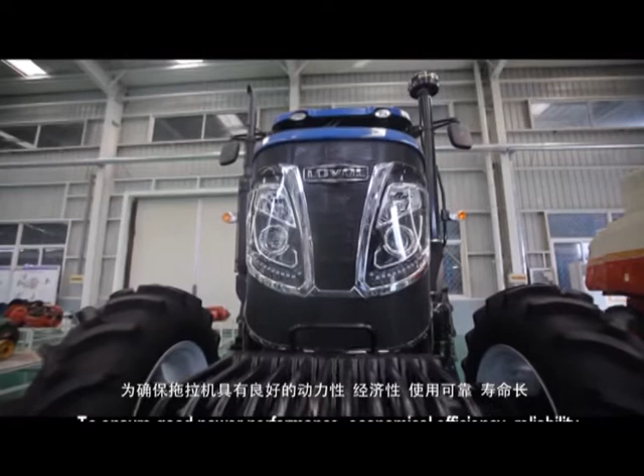Hello dear users. To ensure good power performance, economical efficiency, reliability and long service life of the tractor, please use the machine with reference to the requirements mentioned in the instructions. Due to constant product updating, technical specifications and structure of our tractor are subject to change and improvement. This may result in the practical product being somewhat different from that in the specification. Please be careful when you use it.

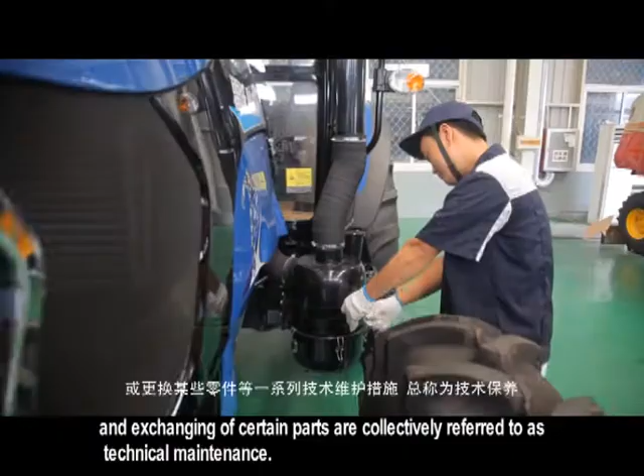Maintenance and service instructions. A series of technical maintenance measures including regular cleaning, checking, lubricating, tightening and adjustments of various parts of the tractor, and exchanging of certain parts are collectively referred to as technical maintenance. Good maintenance can slow the pace of deterioration of technical conditions of various parts, reduce failure, prolong service life, and ensure good working condition of the tractor.

Technical maintenance procedures. Maintenance intervals of Lovol series tractor, according to accumulated work hours, include technical maintenance per shift, every 10 work hours, every 50 hours, every 200 hours, every 400 hours, every 800 hours, every 1600 hours, and special winter maintenance and service, and technical maintenance for long-time storage.

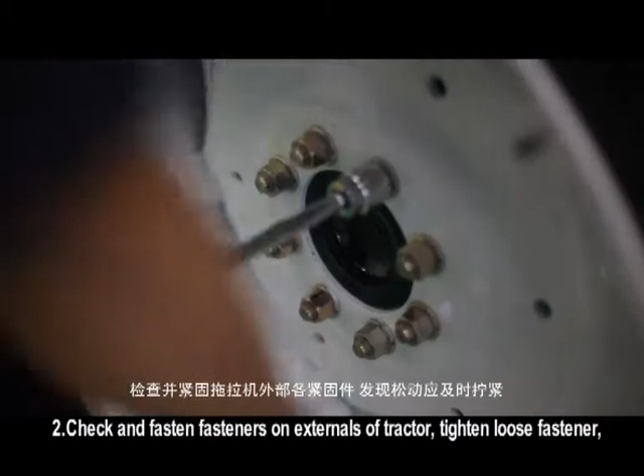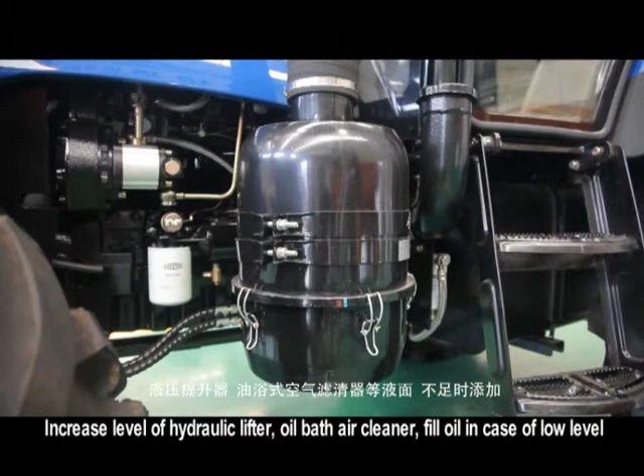Technical maintenance per shift. Clean dust and oil dirt on the tractor. Check and fasten fasteners on externals of the tractor, tighten loose fasteners, especially the nut on the front wheel. Check engine oil pan, water tank, fuel tank, hydraulic steering tank, service brake tank, hydraulic lifter, oil bath air cleaner, and fill oil in case of low level. When checking the level of the oil pan, the tractor must be parked on level ground. Check it 15 minutes after the engine stops.

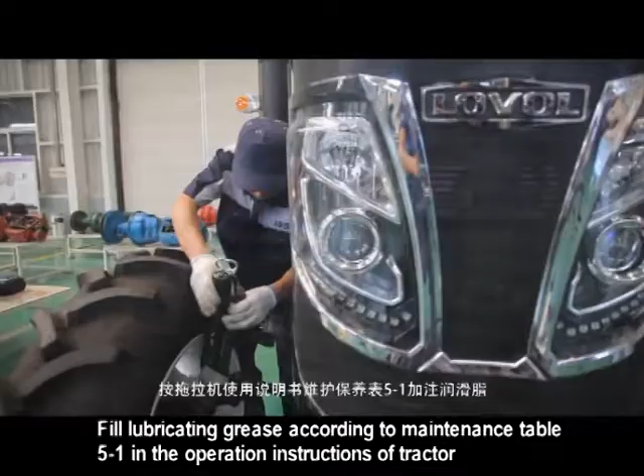Attention! If water temperature is too high, stop the engine to cool the water to below 40 degrees Celsius, then open the filler cap to refill coolant, wearing gloves or using cotton cloth. Fill lubricating grease according to Maintenance Table 5-1 in the operation instructions of the tractor.

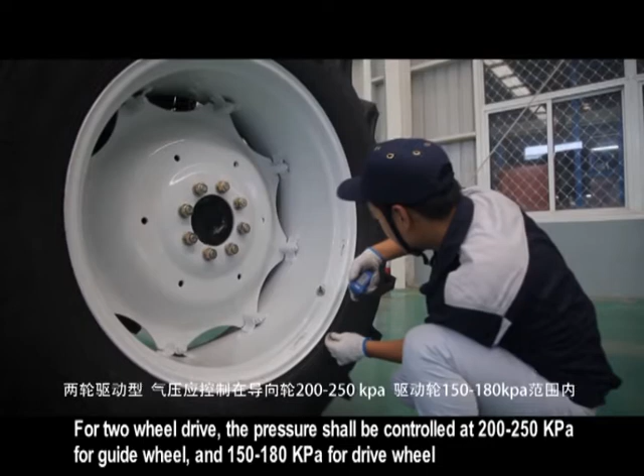Check air pressure of front and rear tires, inflate in case of insufficient pressure. For two-wheel drive, the pressure shall be controlled at 200 to 250 kPa for guide wheel, and 150 to 180 kPa for drive wheel. For four-wheel drive, the pressure shall be controlled at 120 to 150 kPa for guide wheel, and 150 to 180 kPa for drive wheel.

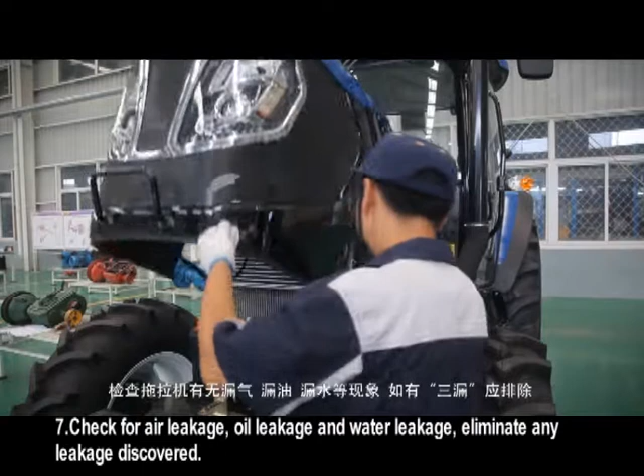Check and adjust the free stroke of main and auxiliary clutch and brake pedal, which shall be 28 to 40 mm for main clutch pedal, 45 to 55 mm for assistant clutch, 12 to 16 mm for brake pedal. Check for air leakage, oil leakage and water leakage. Eliminate any leakage discovered. According to requirements in the operating and maintenance instructions for the diesel engine, maintain the diesel engine according to requirements for technical maintenance for routine shift.

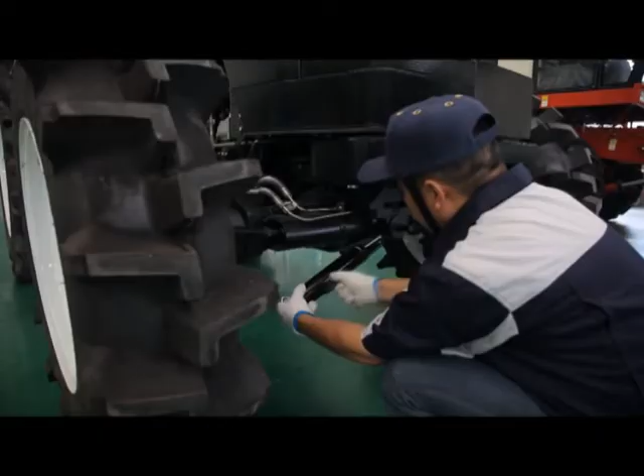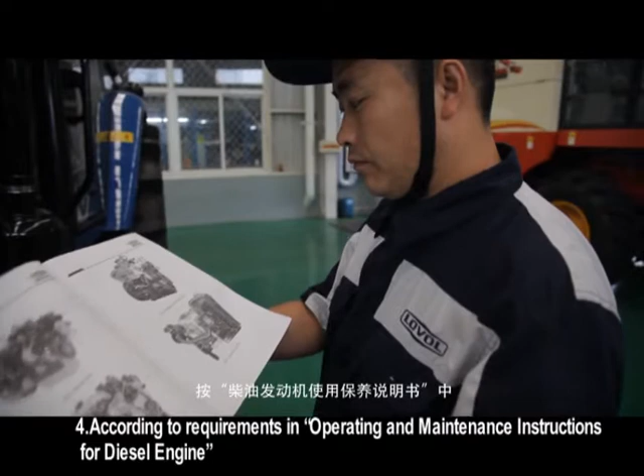Technical maintenance every 50 hours. Complete all works of technical maintenance per shift. Fill lubricating grease according to Maintenance Table 5-1 in the operation instructions of the tractor: front-axle pendulum of four-wheel drive, axle bed of front drive shaft, rock shaft of main and auxiliary clutch. Check the oil level in oil bath air filter and remove dust. According to requirements in the operating and maintenance instructions for the diesel engine, maintain the diesel engine according to requirements for Class I technical maintenance.

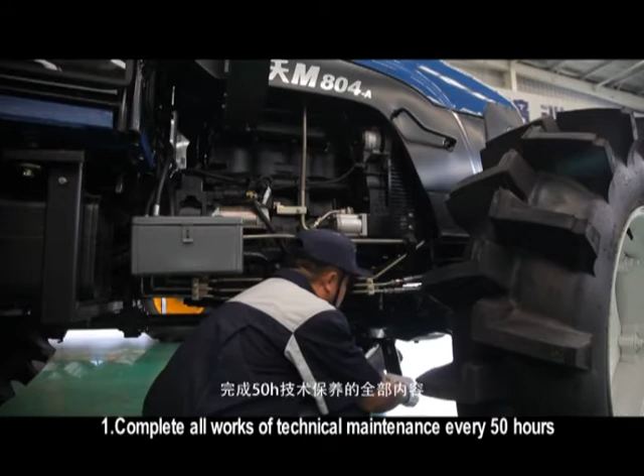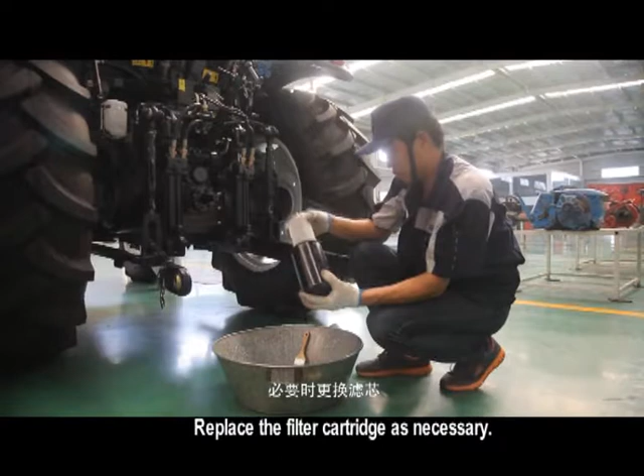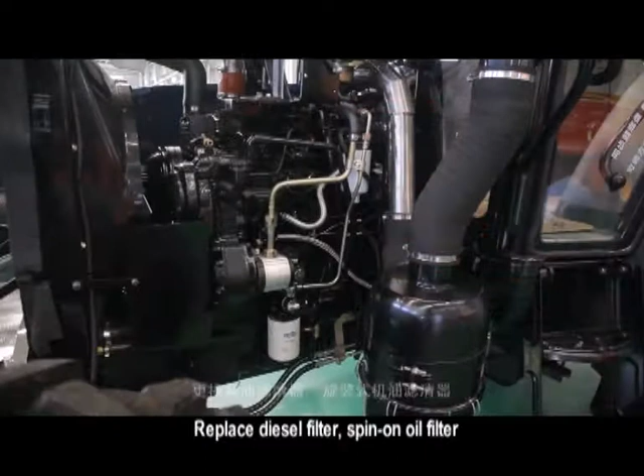3. Technical maintenance every 200 hours. Complete all works of technical maintenance every 50 hours. Change oil pan grease of diesel engine. Clean and maintain oil basin of oil bath air filter. Clean hydraulic oil filter of lifter. Replace the filter cartridge as necessary, according to requirements for Class II technical maintenance and the specification for operation and maintenance of the diesel engine. Conduct maintenance for diesel engine. Replace diesel filter and spin-on oil filter.

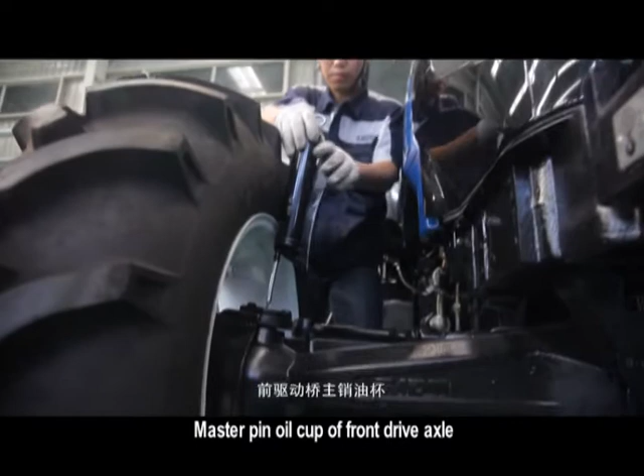4. Technical maintenance every 400 hours. Complete all works of technical maintenance every 200 hours. Fill lubricating grease according to Maintenance Table 5-1 in the operation instructions of the tractor: master pin oil cup of front drive axle. Check central drive of front drive and oil level of end drive.

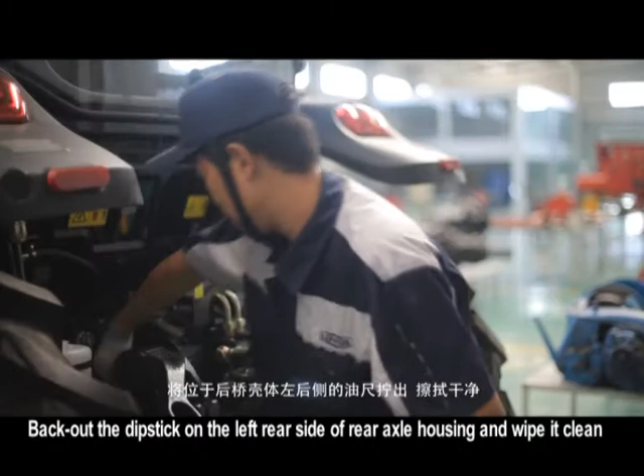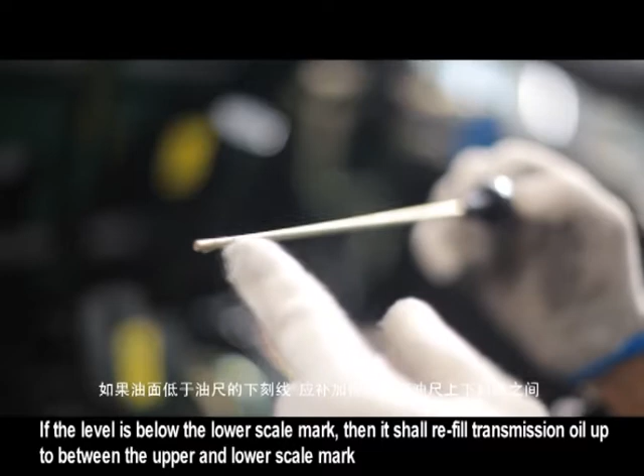Add oil as necessary. Check oil level of transmission system. Add oil as necessary. When checking the oil level, the tractor must be parked on level ground and flamed out. Back out the dipstick on the left rear side of rear axle housing and wipe it clean. Then place dipstick in. If the level is below the lower scale mark, then refill transmission oil up to between the upper and lower scale mark.

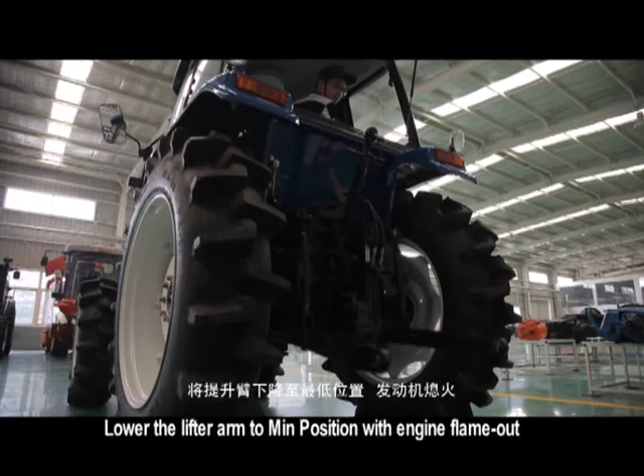Measure oil level 5 minutes after oil refilling. Park the tractor on level ground and check the oil level. Lower the lifter arm to min position with engine flamed out. Back out the upper cover of dipstick, check oil level. If the level is below the lower scale mark, then refill transmission oil up to between the upper and lower scale mark. Check the free stroke of parking brake handle and make adjustment as necessary.

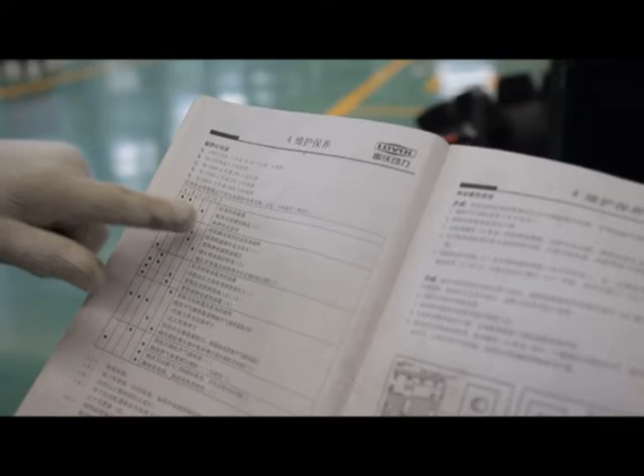Clean and maintain hydraulic steering tank filter. According to requirements in the operating and maintenance instructions for the diesel engine, maintain the diesel engine as per requirements for Class II technical maintenance.

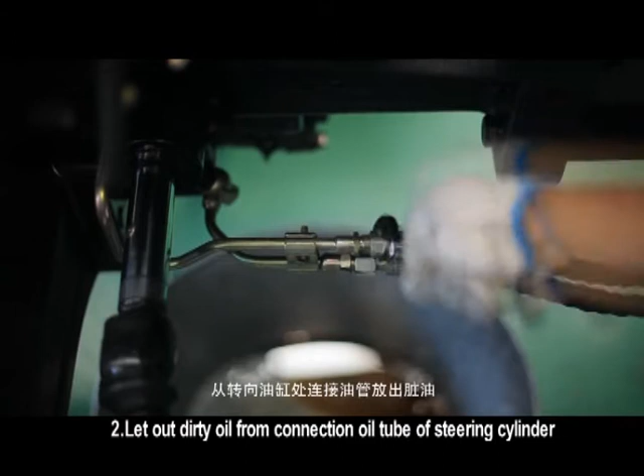Technical maintenance every 800 hours. Complete all works of technical maintenance every 400 hours. Let out dirty oil from connection oil tube of steering cylinder. Replace transmission hydraulic oil of hydraulic steering system. Use Lovol special oil when replacing transmission system lubricating oil.

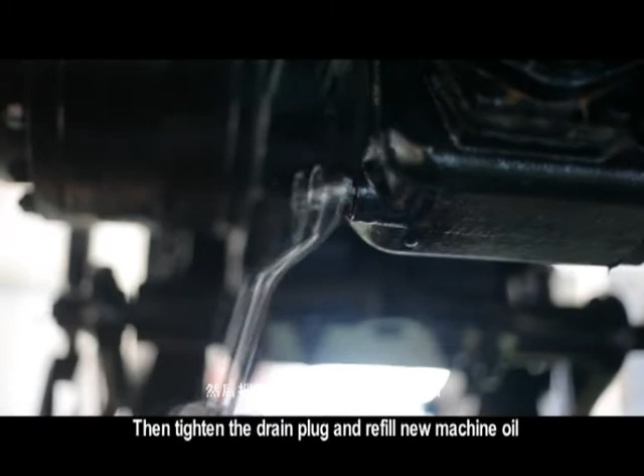Remove the drain plug at the bottom of transmission case. Let out dirty oil and clean with diesel oil. Then tighten the drain plug and refill new machine oil. Use Lovol special oil when replacing lifter hydraulic oil. Remove the drain plug, empty dirty oil and clean the transmission case. Refill new oil as required.

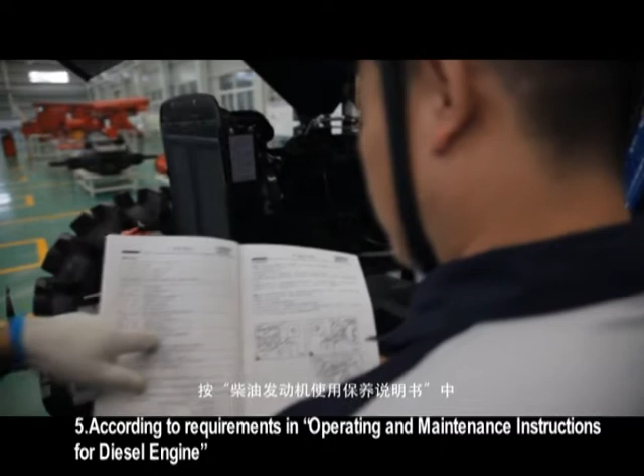Clean and maintain fuel tank. According to requirements in the operating and maintenance instructions for the diesel engine, maintain the diesel engine as per requirements for Class III technical maintenance.

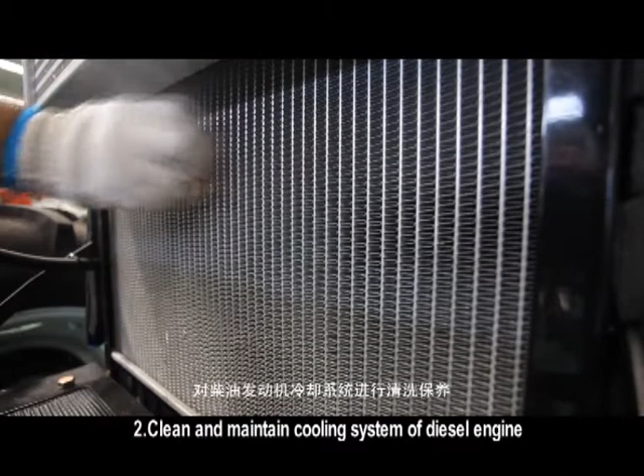6. Technical maintenance every 1600 hours. Complete all works of technical maintenance every 800 hours. Clean and maintain cooling system of diesel engine. Replace lubricating oil for main drive of front drive axle and final drive. Check, adjust and maintain the starting motor.

According to requirements in the operating and maintenance instructions for the diesel engine, maintain the diesel engine as per requirements for Class 3 technical maintenance. Maintain and service parts of Lovol TD series tractor. For operation contents, please refer to the operation instruction of each series products.

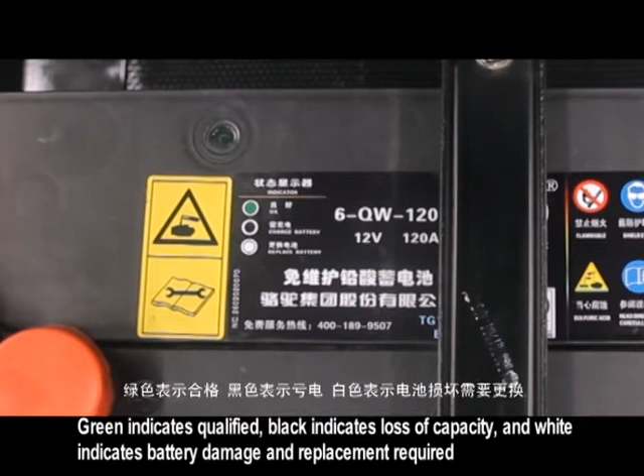Maintenance and service of the maintenance-free battery. Maintenance requirements of maintenance-free battery. Check if the battery is firmly fixed on the tractor. Check the battery surface for gouges and bruises. Check if the battery cable is firmly connected. Check charging condition and quality status of battery via the electric eye. Green indicates qualified. Black indicates loss of capacity, and white indicates battery damage and replacement required.

Precautions: battery shall be stored after full charge, loss of capacity storage is prohibited. Battery shall be checked every 3 months, replenishing charging shall be conducted in case the voltage drops below 12.5 V, in order to prevent charging difficulty after long time storage and compromising battery service life.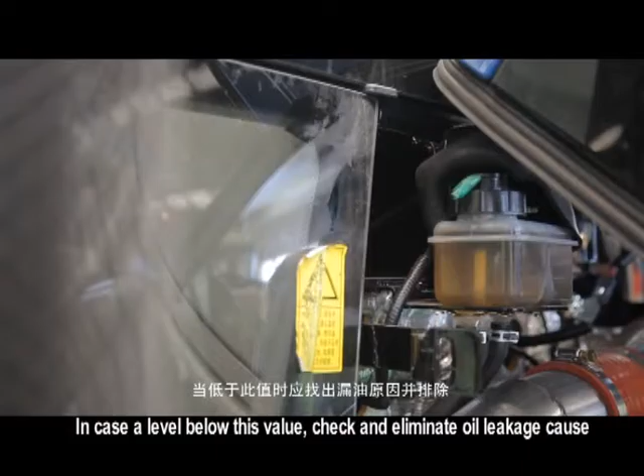2. Maintenance and service of drive brake tank. Brake liquid level shall be 10 to 15 mm higher than the middle convex platform. In case the level is below this value, check and eliminate oil leakage cause. Then refill oil. Attentions: 1. Too little brake fluid will cause brake failure and result in major safety accident. 2. Hydraulic braking oil must be synthetic oil. Braking oil containing alcohol or other machine oil cannot be used, in case of brake failure and major safety accident.

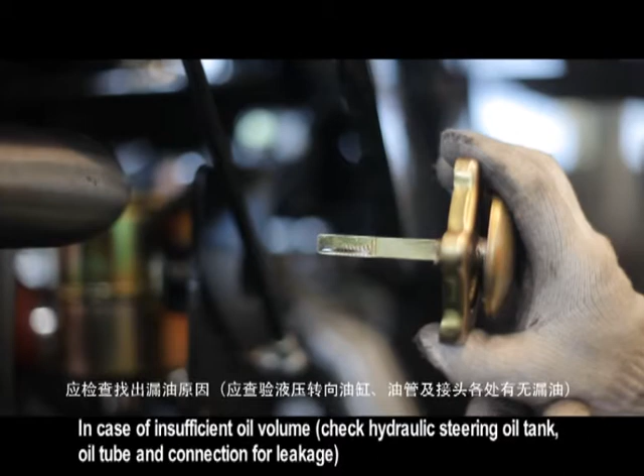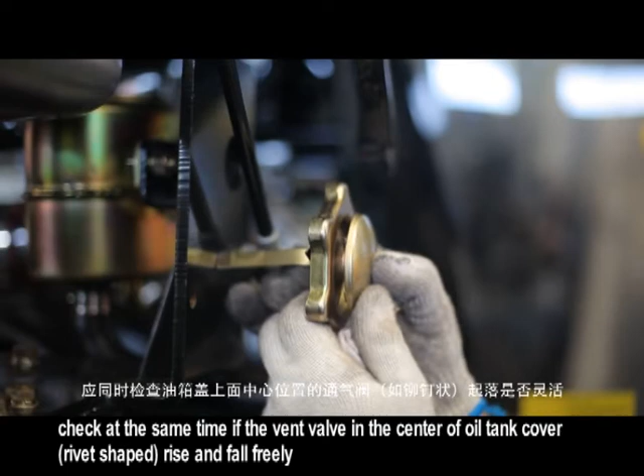3. Inspection and maintenance of hydraulic steering oil tank. Open the oil tank cover and check the oil trace position. In case of insufficient oil volume, check hydraulic steering oil tank, oil tube and connection for leakage. Then refill oil up to the middle scale mark of dipstick. Check at the same time if the rivet-shaped vent valve in the center of oil tank cover rises and falls freely. In case oil stain hampers free movement of vent valve, clean the oil stain.

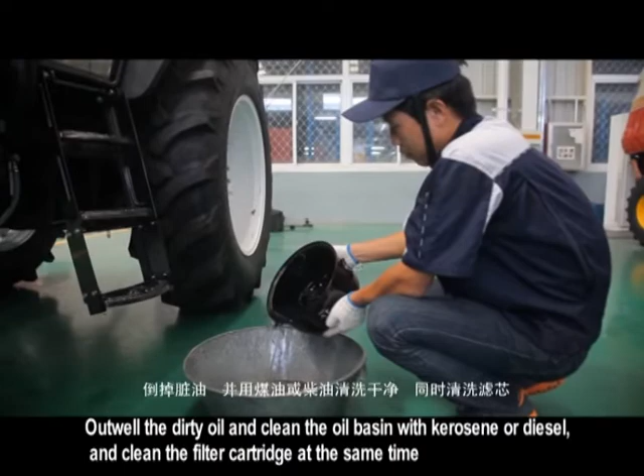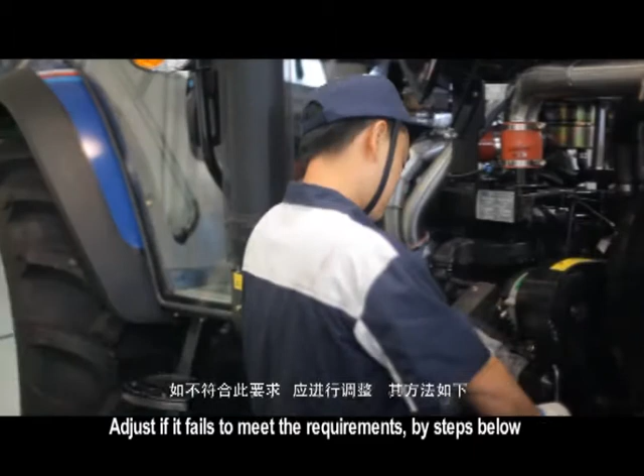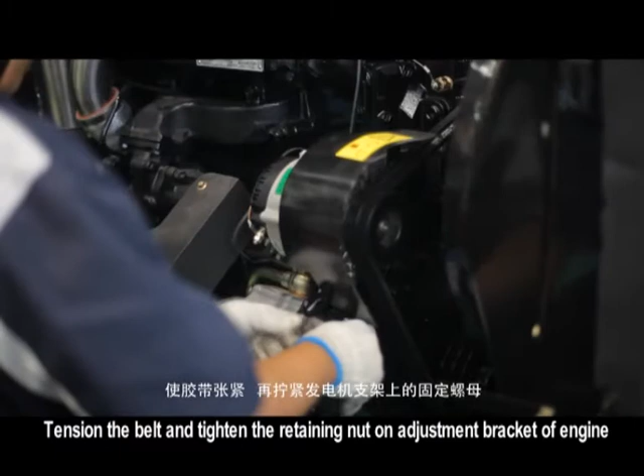5. The adjustment of belt tension. Press down with thumb the middle part of the fan belt. The force applied shall be 29.4-49.0 N. The sagging distance is 15 plus or minus 3. Adjust if it fails to meet the requirements, by steps below. Loosen the retaining nut on adjustment bracket of engine, turn the generator outward. Tension the belt and tighten the retaining nut on adjustment bracket of engine.

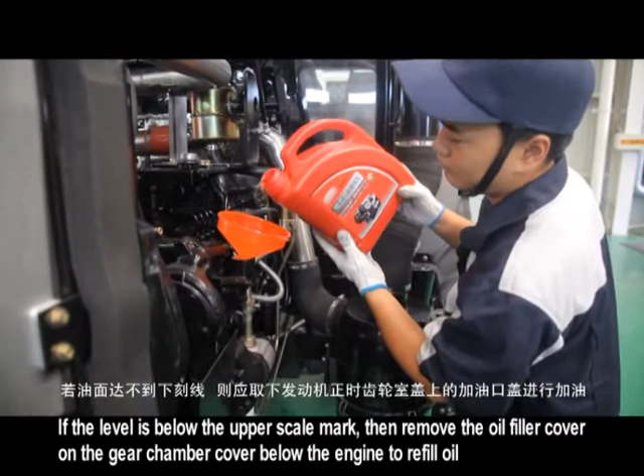6. Check oil volume in engine oil pan and replace oil. Pull out the dipstick on the left front side of the engine oil pan and check whether the oil level falls between the upper and lower scale marks. If the level is below the upper scale mark, then remove the oil filler cover on the gear chamber cover below the engine to refill oil.

Screw out the drain plug below the oil pan during maintenance and oil replacement. Empty dirty oil and clean the oil pan, then refill new oil. 7. Maintenance of front axle. Fill grease to master pin sleeve, central master pin sleeve of front axle. Check the tie rod ball pin nut and the pin nut on both ends of cylinder for looseness.

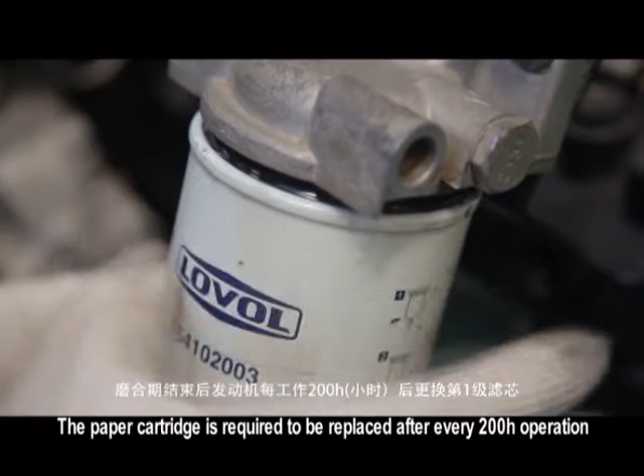8. Maintenance of fuel filter. Engine employs two filters arranged in series. The first filter is near the fuel tank, and the second filter is at the fuel inlet of engine. It is not allowed to clean the paper cartridge of the filter. The paper cartridge is required to be replaced after every 200H operation. Check the filter inside for water.

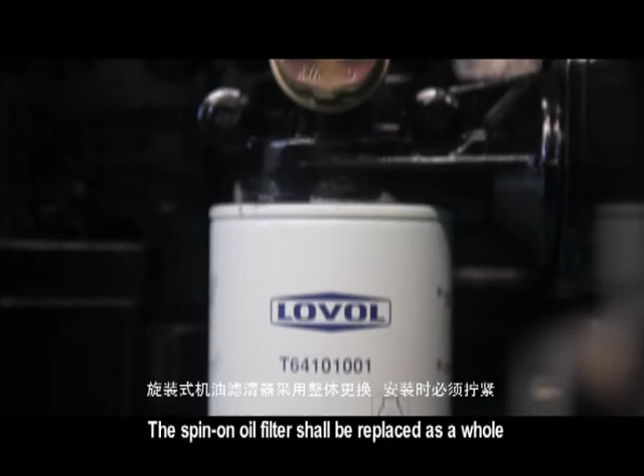9. Maintenance of spin-on oil filter. Oil filter is located on the left lower side of the engine. After the run-in period is finished, the paper cartridge is required to be replaced after every 200H operation. The spin-on oil filter shall be replaced as a whole.

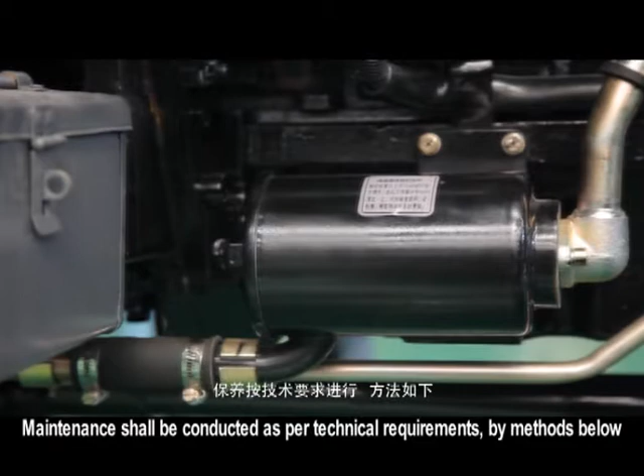10. Maintenance of hydraulic filter. Oil suction filter of lifter is located at the lower right side of the engine. Maintenance shall be conducted as per technical requirements, by methods below. Remove the rear end cover of hydraulic filter to take out the mesh filter cartridge. Clean the filter cartridge with gasoline and blow down with compressed air. If the filter is hard to clean or has been damaged, new filter cartridge shall be replaced.

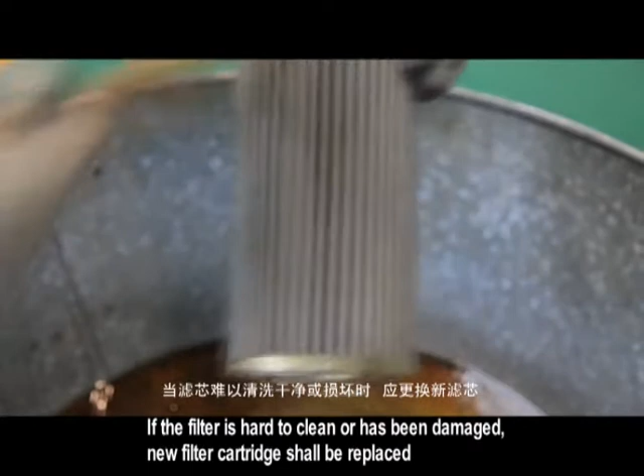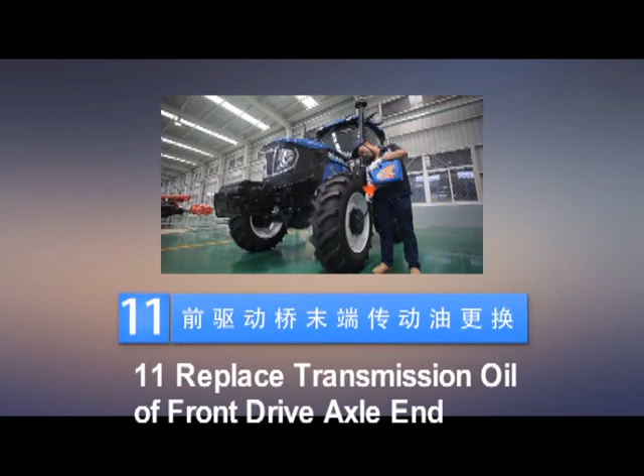Scavenge filter is located on the left side of lifter shell, which shall be cleaned every 200H operation. If the filter is hard to clean or has been damaged, new filter cartridge shall be replaced. 11. Replace transmission oil of front drive axle end. When replacing transmission oil of front drive axle end, the plug mouth shall be at the lowest position to let out dirty oil. Place the plug mouth at horizontal position and add new oil up to plug mouth.

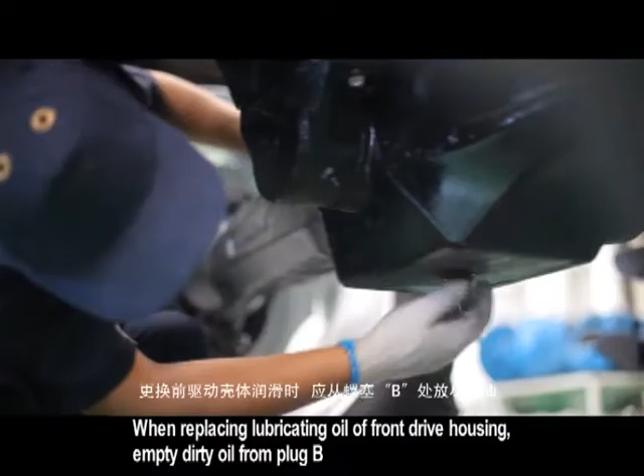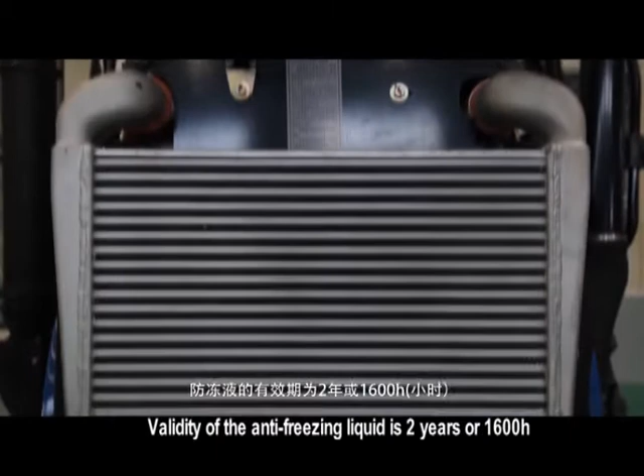12. Replace lubricating oil of front drive housing. When replacing lubricating oil of front drive housing, empty dirty oil from plug B. Retighten plug B, and add new oil from plug A. 13. Maintenance of engine cooling system. Boiled tap water or anti-freezing liquid could be used as engine coolant. Validity of the anti-freezing liquid is 2 years or 1600H. Beyond validity period, anti-freezing liquid shall be replaced and cooling system washed.

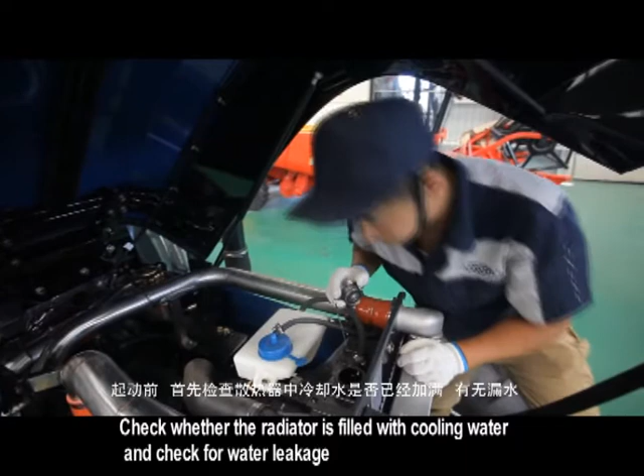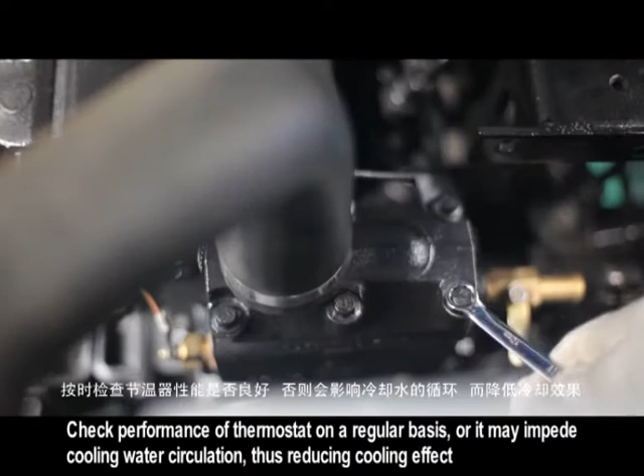Precautions for use of radiator. Check whether the radiator is filled with cooling water and check for water leakage. Check whether the radiator cap is firmly fastened. Check regularly for blockage due to weeds, dust or greasy dirt and clear the blockage if any. Clear regularly incrustation in cooling system to guarantee heat dissipation of heat exchange surface. Check performance of thermostat on a regular basis, or it may impede cooling water circulation, thus reducing cooling effect.

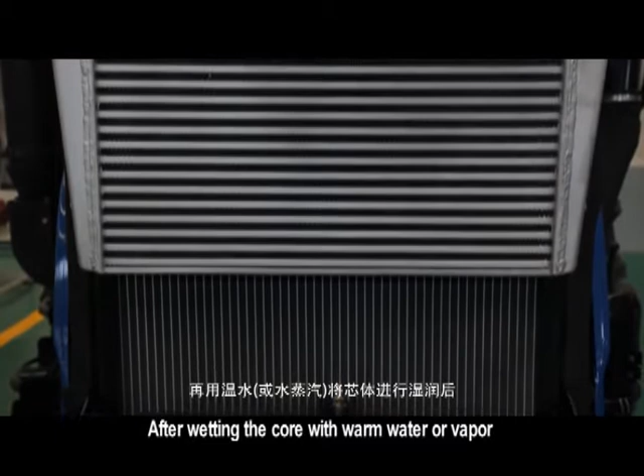Cleaning of the cooling system. Remove weeds and sundries before cleaning. After wetting the core with warm water or vapor, dry the core with compressed air. 14. Maintenance and service of breather. After tractor stops, remove the breather of drive lifter. Replace new breather filter cartridge and install the breather again. Check if the breather is unobstructed.

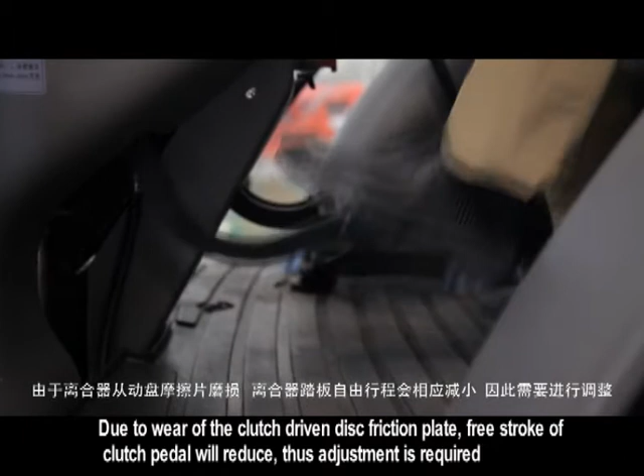Adjustment and maintenance of clutch. Due to wear of the clutch-driven disc friction plate, free stroke of clutch pedal will reduce, thus adjustment is required. 1. Adjustment of clutch and its control mechanism. Adjust the main clutch control mechanism as per steps below.

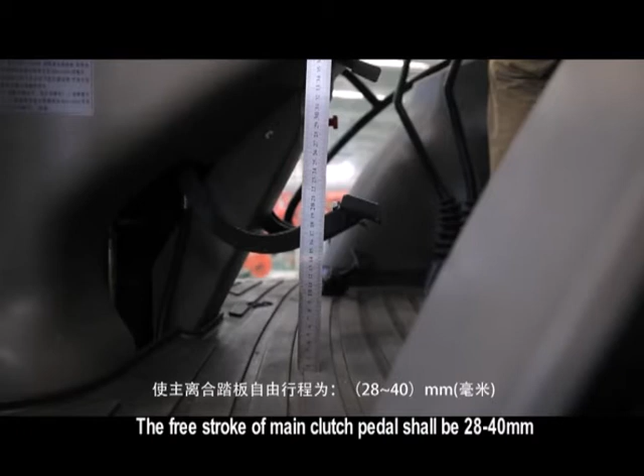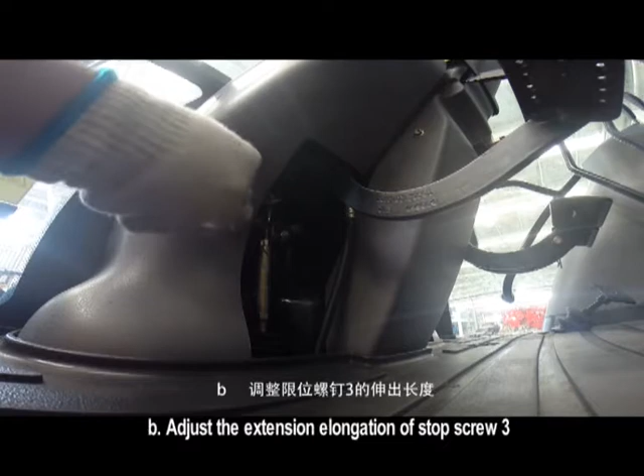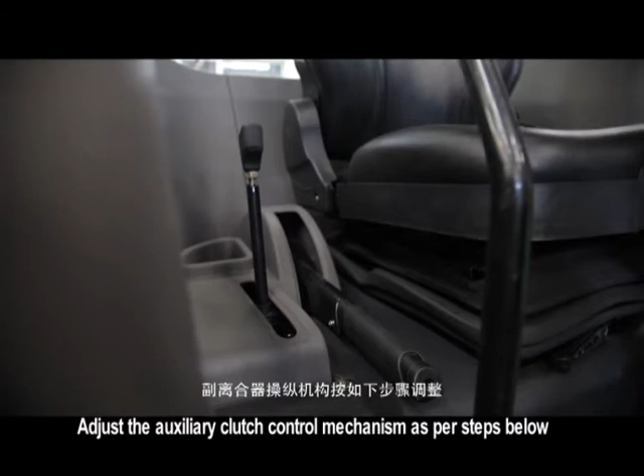Adjust the auxiliary clutch control mechanism as per steps below. A. Adjusting the length of pull rod 13 of auxiliary clutch, the free stroke of handle 1 of auxiliary clutch shall be 45 to 55 mm. Then lock pull rod nut.

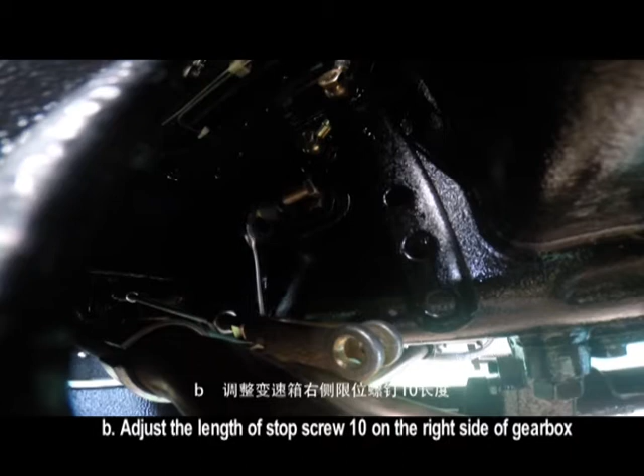B. Adjust the length of stop screw 10 on the right side of gearbox. Full stroke of auxiliary clutch handle 1 shall be limited within 255 to 270 mm. Fully open the auxiliary clutch, make power output to shift gear freely. Lock the stop screw 10 with a nut.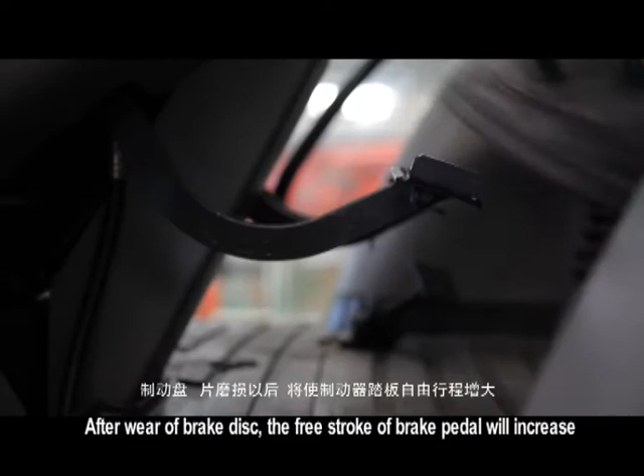2. Brake adjustment. Brake includes travel braking and parking braking. After wear of brake disc, the free stroke of brake pedal will increase, resulting in ineffective braking, or brake failure and consequent serious accident in worst case. By adjusting the stop screw 11, make the pedal center 175 to 185 mm above the floor.

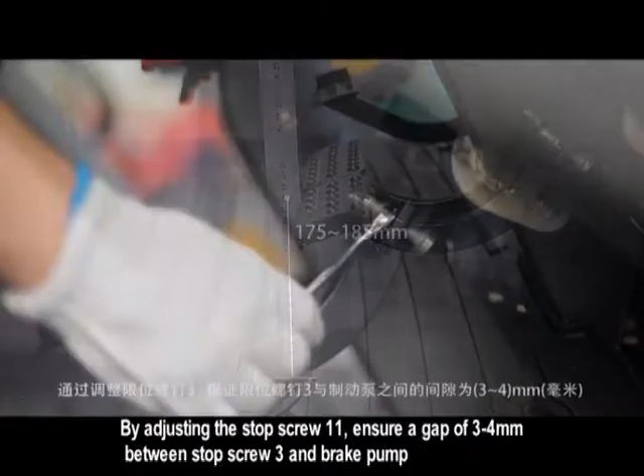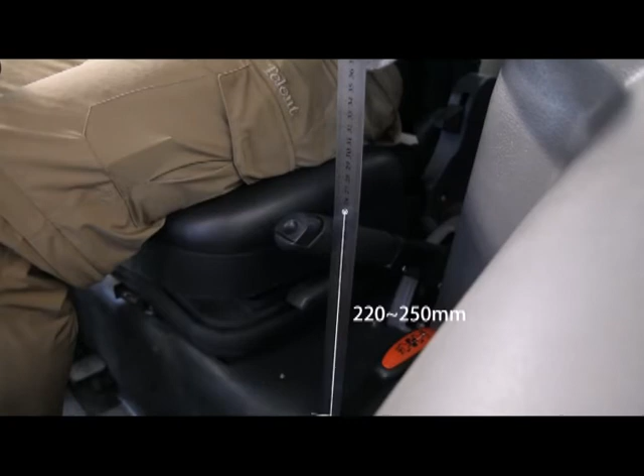By adjusting the stop screw 11, ensure a gap of 3 to 4 mm between stop screw 3 and brake pump. Control the stroke of clutch pedal within 12 to 16 mm. Working stroke of manual brake handle shall be 220 to 250 mm. Adjust the length of manual tie rod to ensure reliable parking brake within specified work stroke.

Specific adjusting method. Put the manual brake handle at the initial position, horizontal position. Loosen nut A, turn adjusting nut B, to adjust the effective length of manual tie rod until the working stroke meets requirement.

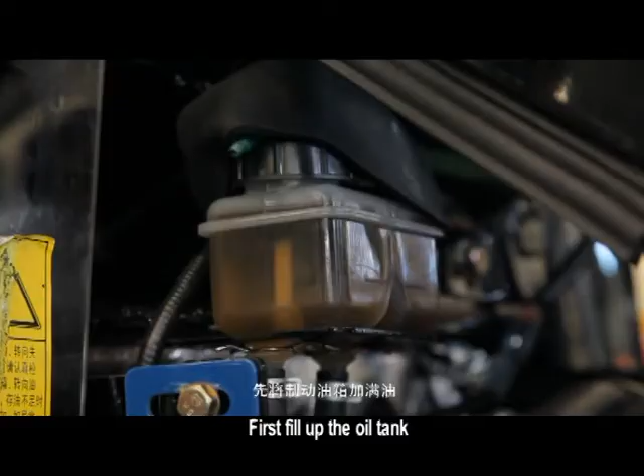Exhaust of brake system. After removal of brake system oil tube, or when conducting brake comfort, synchronism, checking and adjustment, exhaust air from the brake system. Air exhaust must be conducted by well-trained and experienced personnel as per steps below. First fill up the oil tank. Then slowly and fully step down left brake pedal to build brake pressure.

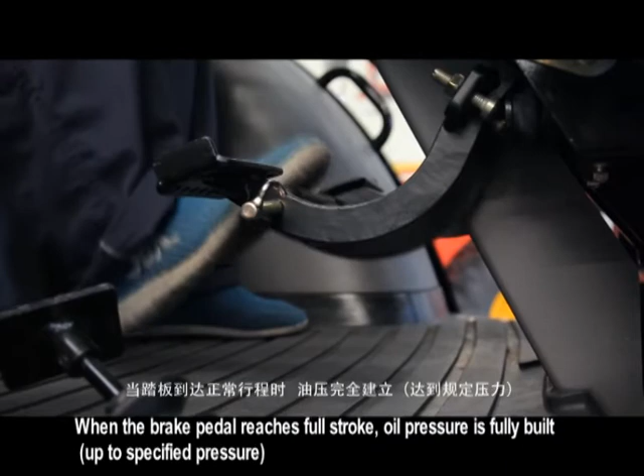Unscrew the bleeder plug A on the top of brake house on one side by half turn to exhaust air. Tighten bleeder plug A, repeat above steps, until the spilled oil is free of bubbles. Then again step down the brake pedal to build oil pressure. When the brake pedal reaches full stroke, oil pressure is fully built, up to specified pressure.

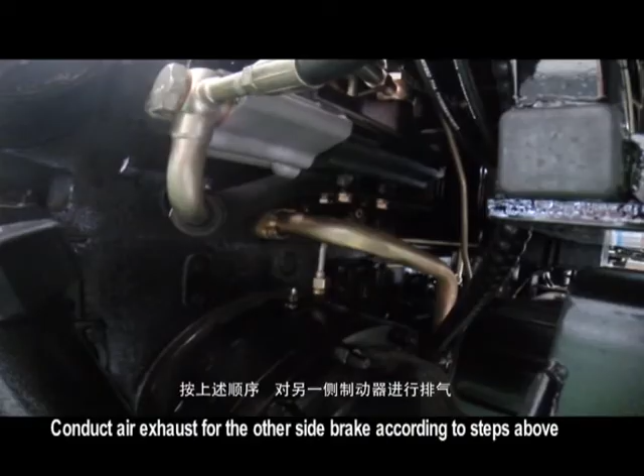Attention: finally wipe clean the oil spilled on the axle shaft house in case paint falls off. Conduct air exhaust for the other side brake according to steps above. Finally fill the brake oil tank to specified level. Warning: brake system may fail if air is not fully exhausted. Attention.

Consistency between free strokes of left and right brake pedals of the tractor must be ensured through adjustment, otherwise accidents may occur due to sharp deflection of tractor to one side.

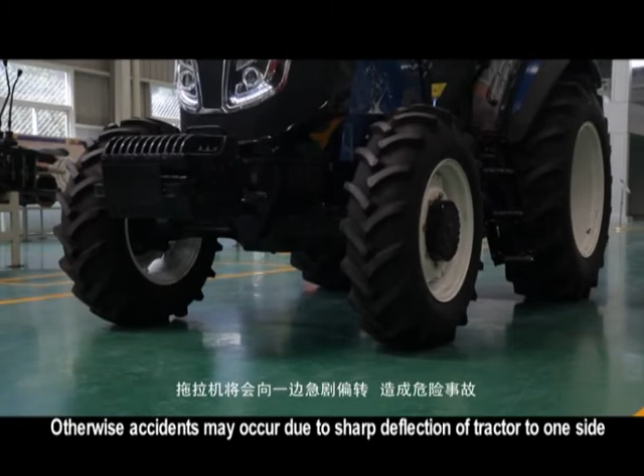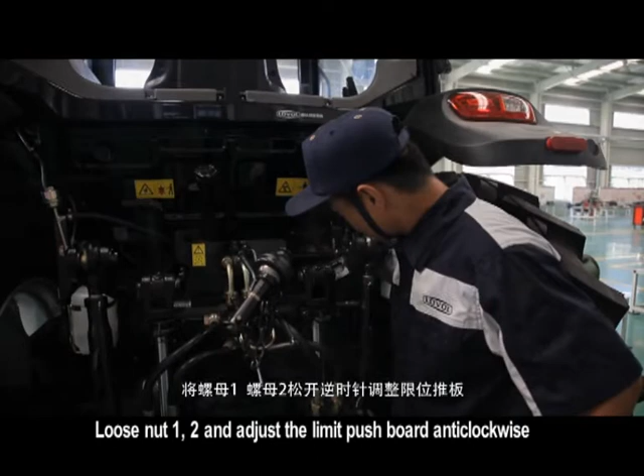3. Lifting system adjustment. 1. Adjustment of lifting heights. Lift the limit push board on the right end of shaft to adjust lifting height. Loosen 1, 2 and adjust the limit push board anti-clockwise. Bigger lifting height, smaller on the contrary.

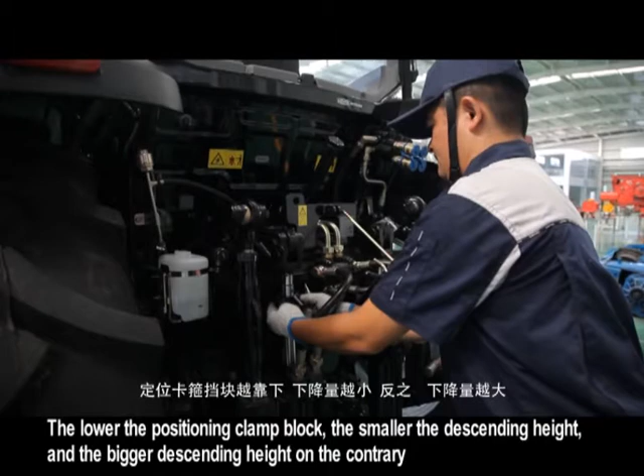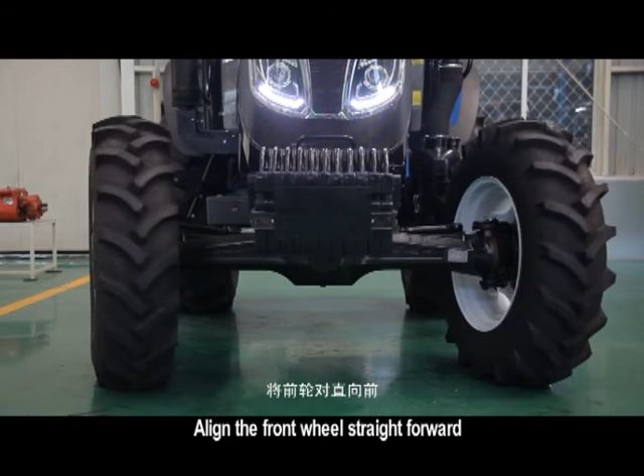4. Toe in value check and adjustment. Check and adjust front wheel toe in value regularly to reduce wear of front wheel tire. Steps. 1. Check and adjust front wheels of 2-wheel drive and 4-wheel drive tractor. Align the front wheel straight forward, at the same horizontal height of front wheel center. Measure distance between front end and rear end of 2 wheels.

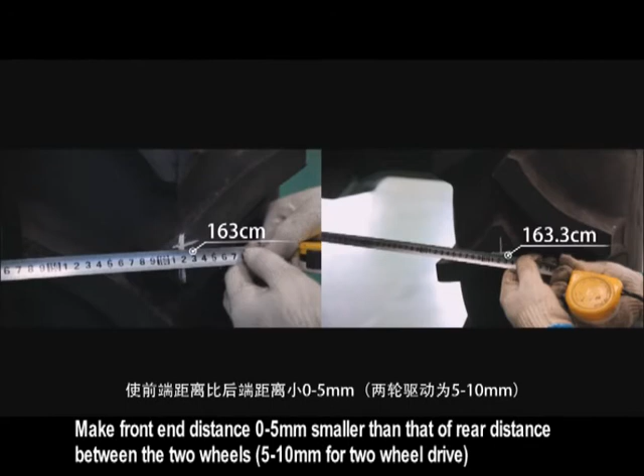Unscrew nut 1 on both ends of cross tie rod to turn cross tie rod 2. Make front end distance 0 to 5 mm smaller than that of rear distance between the 2 wheels, 5 to 10 mm for 2-wheel drive. Unscrew nut on both ends of cross tie rod.